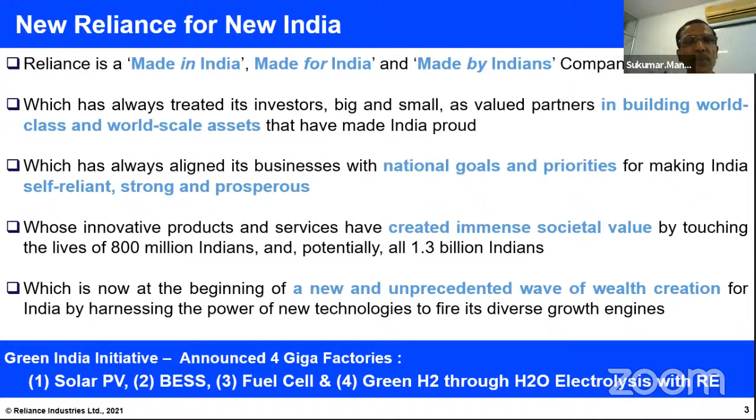And as you know, already our honorable chairman declares that 4 Giga Factories for transitioning the energy, considering the present changes. Now I'll come back to my presentation.

So basically my agenda to cover is a small introduction, then OTC, the oil to chemical approach - what is that, what are the global trends, direct steam cracking, then different configurations for max aromatics or max olefins. Then I'll talk a little about the MCC process, called multi-zone catalytic cracking process, and the economic comparisons of the different configurations with MCC. And then I'll summarize.

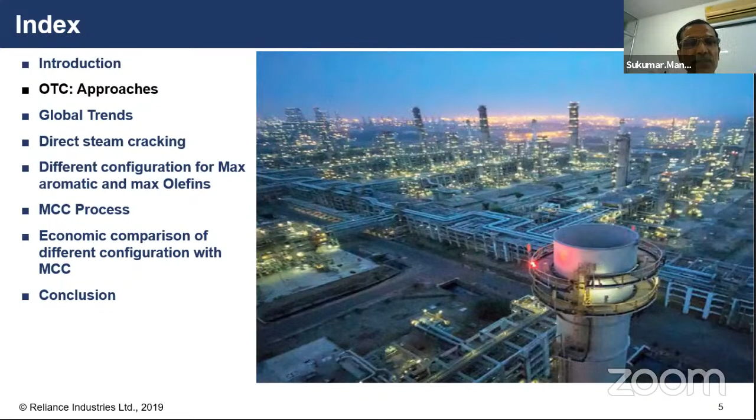Now, why is the future of oil in chemicals? To address that, the major point is that innovation in oil to chemical technology development is mainly driven by 2 major factors. The first: depending on the rate of transition from the IC engine to EV, global demand on transportation fuel like gasoline and diesel may reach a peak around the year 2030, and may begin to decline rapidly beyond 2040, and thus the market needs new directions. Different people may pick a different year for this peak, but surely it is going to reach a peak and then decline, considering the present facts.

The second factor is that the supply-demand gap for chemicals and petrochemicals is increasing rapidly, especially in India, with an upward trend in GDP. As you know, GDP growth times 1.5 is basically the chemical growth - this is a notional kind of correlation. Hence, oil to chemicals is an opportunity to convert low value into high value chemicals, and therefore there's a push to convert barrels of oil into the chemical market. Hence, several disruptive technologies are being developed that remove the boundary between refinery and petrochemical plants while improving margin over making fuel products.

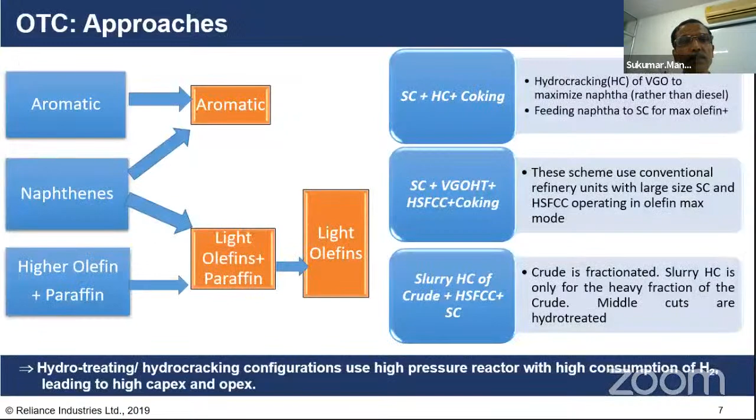So now, what is the whole global trend? Existing refineries are reconfiguring towards 10-25% crude to chemical, because presently, less than 10% of crude is converted to BTX and olefins. So by using existing refineries with existing processes, new catalysts, and new asset additions, making olefins and chemicals at 10-25% - that's why they adopt steam crackers to upgrade C3, C4 to light olefins.

Then they upgrade the heavy naphtha using a reformer to make high aromatics. You do hydrocracking to make a lighter feedstock for the steam cracker, or make a feedstock for the high severity FCC, and high severity FCC basically upgrades the VGO to light olefins and gasoline. This is the normal trend - one of them is steam cracking of the entire crude to light olefins.

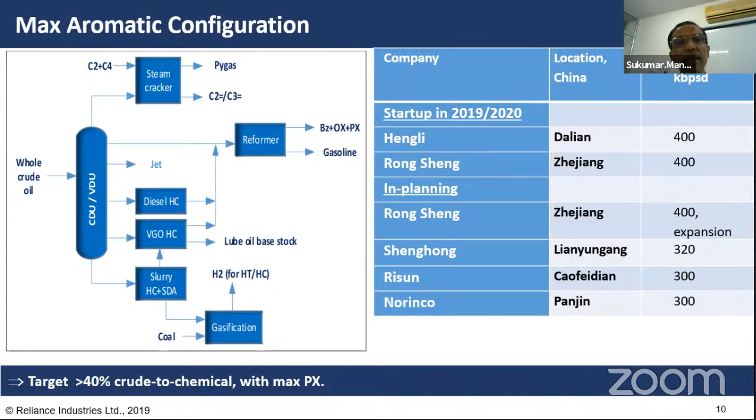Based on this configuration, some examples are well known in practice in China, like Hengli refinery, that is Dalian refinery, or Zhejiang refinery. They already have 400 kbpsd in operation, and they are also already planned and operating some of these refineries, like Zhejiang, Lianyungang, Caofeidian, and Panjin. This configuration's main aim is to maximize BTX.

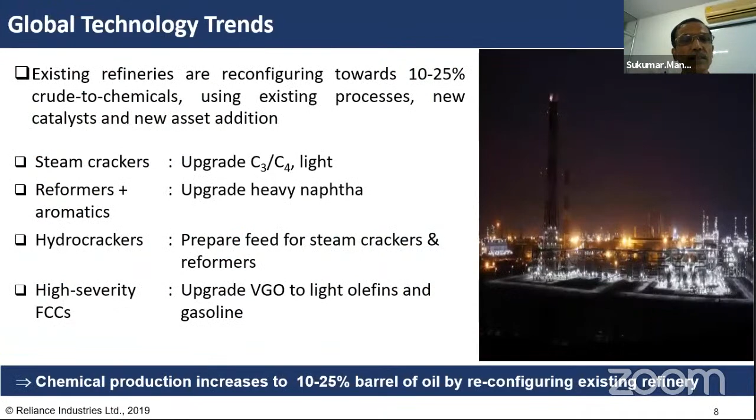Sorry. So, Mandalji, 3 minutes. Yeah.

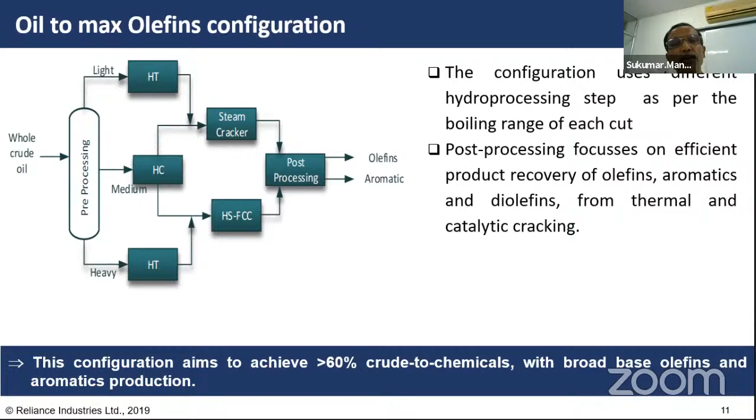In this configuration, basically to maximize olefin, this is the olefin-maximizing configuration. If you see, it uses again hydrotreating, hydrocracking, and ultimately steam cracker and HSFCC. After post-processing, they are making olefins and aromatics. This configuration's purpose is to make more olefin, particularly ethylene.

Then, in this context, Reliance has developed a process called multi-zone catalytic cracking, where a single riser with multi-zones does sequential cracking of different available feedstocks: crude, C4 to resid, both paraffinic and olefinic feeds, and oxygenates. It makes petrochemicals more than 70%, including ethylene more than 25%, propylene 30 to 35%, and BTX 15%.

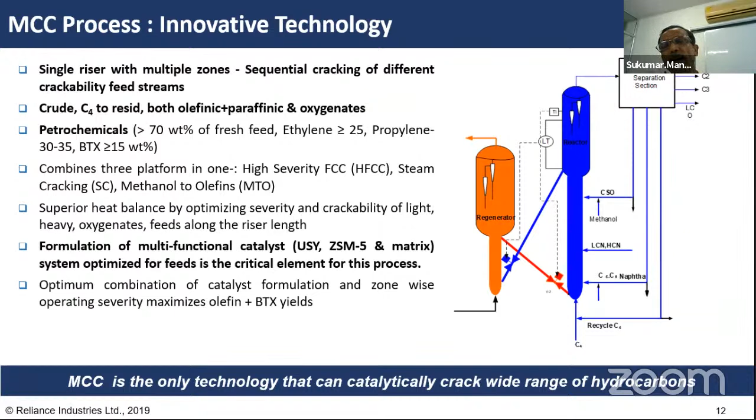This is possible by a combination of multifunctional catalysts, and it's basically a heat balance between light feed and heavy feed. This configuration is like FCC, but the major innovation is that it is a multi-zone catalytic cracking, and you are injecting feed depending on the cracking severity required for each kind of feedstock to be processed.

The right side configuration shows the MCC reactor, gas fractionators, and after separation, whatever ethane and propane is there, you basically send to the gas cracker furnace, using the same gas configuration again. Whatever naphtha you are producing, you do aromatic extraction using a Reliance innovative process. So you take the naphtha out, the aromatics out, and then recycle the non-aromatic part back to the riser.

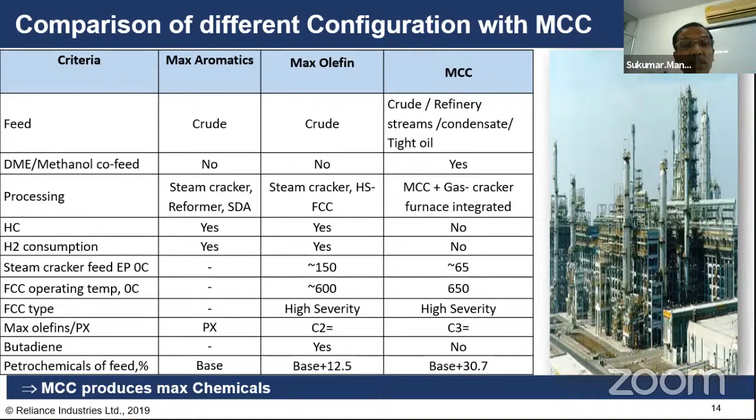And if you see this value, the MCC case maximizes both BTX and olefins. This last slide compares the yield. What we have done here, we call it constant HVC, meaning high value chemical - that is ethylene, propylene, and BTX.

So here we have compared making 4.75 million metric tons of high value chemicals. In the first configuration, the max aromatic case makes 7.6 ethylene, which is 20.6 for the max olefin case, and for MCC case is 22. Propylene is only 2.94, whereas it is 20 for the max olefin case, and in case of MCC 31.3. BTX is maximized for the max aromatic case, that's 28.4, it is 11.1 for max olefin, then 16.3 for our case.

So the total high value chemical yield is 42.6% for the high aromatic case, whereas the high olefin case is 52 plus, and it is around 70% for the MCC case. And if you see the capex, capacity and all, you need 12.2 million metric tons for making the same amount of HVC, whereas in case of MCC it requires only 6.8. The capex is basically more or less only 55% of the base case. The simple payback is only 3.24 versus 5.

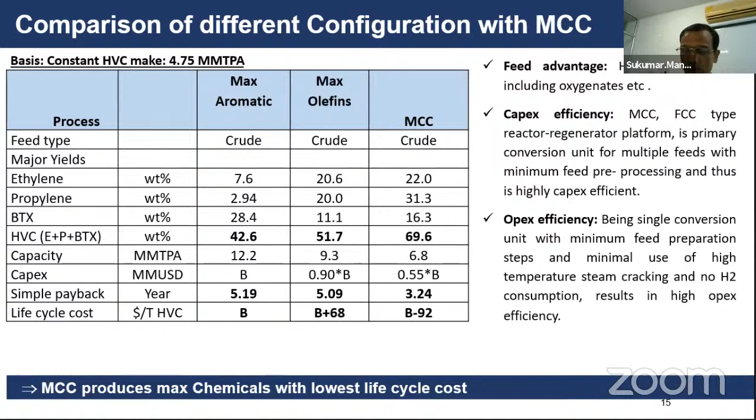And the life cycle cost, which is calculated based on capex charges plus operating cost, in our case shows an advantage of more or less around $100 per metric ton. This is only possible due to three factors: feed advantage, capex efficiency, and OPEX efficiency. That's the reason for getting the advantage for the MCC process.

So I just want to conclude from this: chemicals will continue to grow due to decline in the growth of transportation fuel. Steam cracking of crude oil to chemicals is not an attractive option. New crude-to-chemical refinery configurations are being developed, exploiting ultimate integration of existing technologies. In this context, MCC provides one such most flexible and capex-OPEX efficient platform, using a highly innovative patented multi-zone concept, which solves many contradictions in the direct conversion of crude oil to chemicals, with great high yield of chemicals and virtually no production of fuels.

With that, thank you very much. We feel the MCC will be a disruptive process for converting a refinery from fuel refinery to chemical refinery. Thank you very much for listening.

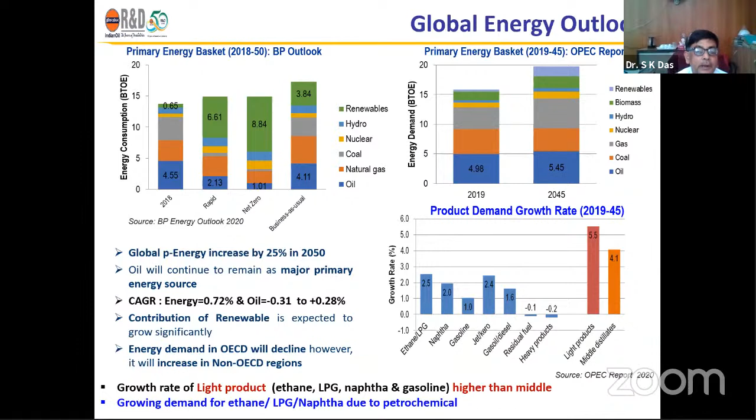As per BP outlook, under all scenarios - business as usual, rapid transition, net zero - Indian primary energy consumption more than doubles by 2050, and the growth is underpinned by the increasing population and prosperity of India. As a result of strong growth, India accounts for 35% of the increase in global primary energy consumption from 2018 to 2050 in the business as usual scenario.

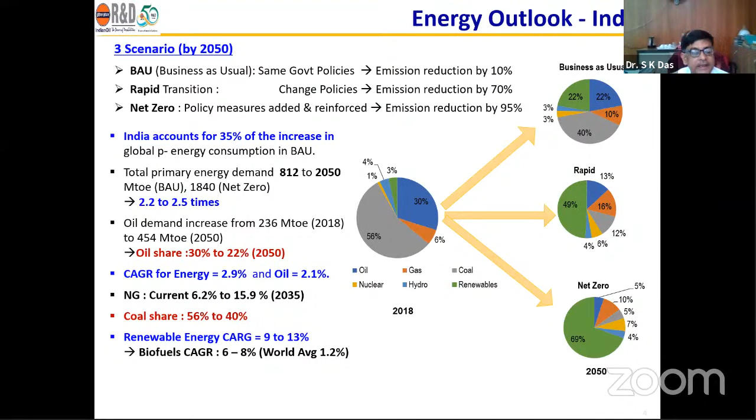However, the contribution of oil in the energy mix may decrease as strict regulatory policy continues to be enforced. In order to ensure the profitability of the refinery, emission reduction along with enhancing chemical yield are to be adopted in a big way. The petrochemical demand forecast based on OPEC and IHS Markit is shown here. Growth in petrochemicals will be contributing about 35 to 40% increase in total oil demand.

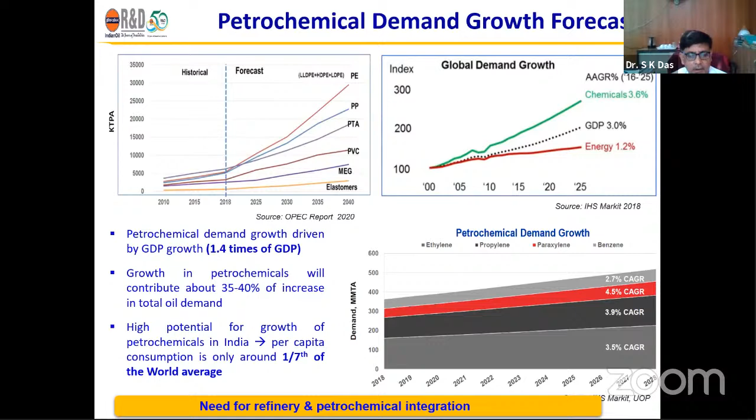Petrochemical demand growth rate is driven by GDP growth rate. It is almost around 1.4 times of GDP. There is a high potential of growth of petrochemical in India since per capita consumption is only 1/7 of the world average. So there is a need for refinery and petrochemical integration.

So what will be the refinery scenario and strategy? They have to maximize distillate production with heavier crude for further conversion and integration with petrochemical, value addition through specialty chemical, and operation flexibility as per crude quality and product demand, and be environment friendly.

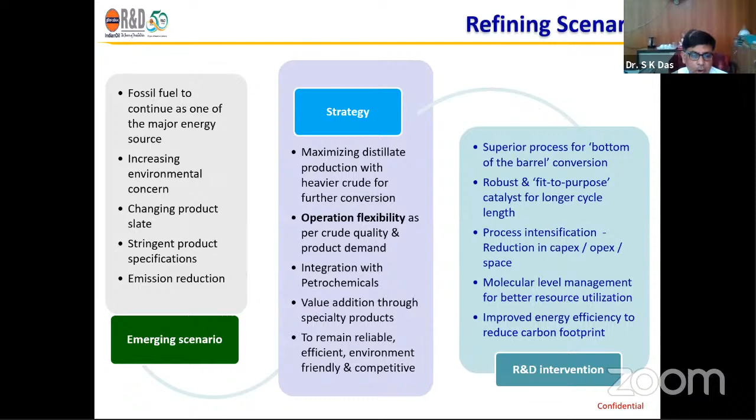A lot of strong R&D intervention is required for development of superior process, bottom of the barrel type conversion, robust fit to purpose catalyst for longer cycle life, and for reduction of carbon footprint, molecular level management for better resource utilization, etc.

As you are all aware, the crude is becoming heavier day by day. So resid content in the crude is also increasing. More resid in the crude means complexity of the refinery also increases. So resid management is a cornerstone of the crude to chemical project selection.

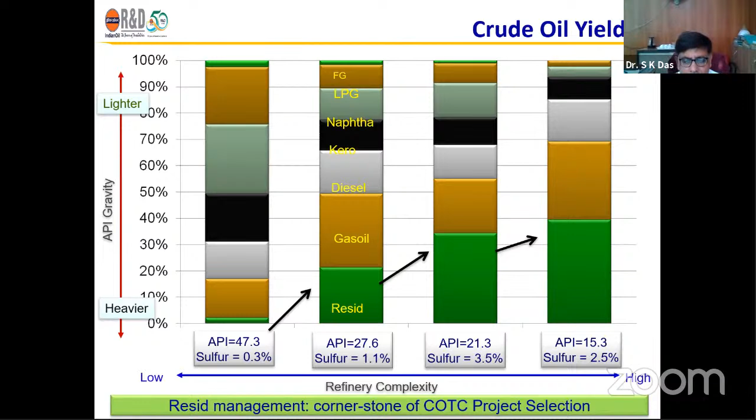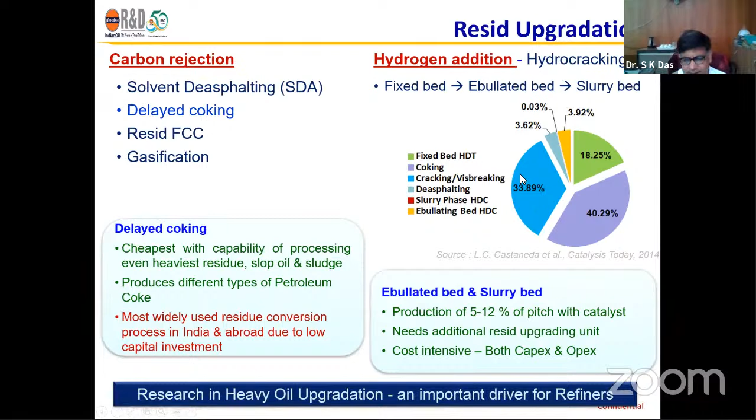Hydrocracking, a hydrogen addition process, has fixed bed, ebullated bed, and slurry bed configurations, but they produce 5 to 12% pitch with catalyst, though it is cost intensive on both counts. So research in heavy oil upgradation is an important driver for the refinery.

So IndianOil's solutions for resid upgradation for the crude to chemical scenario. Several internal resid upgradation technologies. Indmax is a milestone technology which can handle VGO up to resid feedstock ratio.

It is a technology for VGO stock. It produces higher light olefins - ethylene, propylene, butylene - high octane gasoline rich in BTX. Delayed coker is another technology for converting resid to value added product through thermal route. Ind-Coker is our advanced coker technology for reduction of coke yield from fuel grade coke. indResid is a slurry hydrocracking technology for upgrading vacuum resid for production of middle distillate meeting BS6 specification.

We have a gasifier technology for converting coke to value-added syngas. Syngas can be further converted to olefins. Along with secondary conversion coupled with residue upgradation, we have INDALIN technology for catalytic cracking, enhancing olefin yield from lighter feedstock such as cracked naphtha.

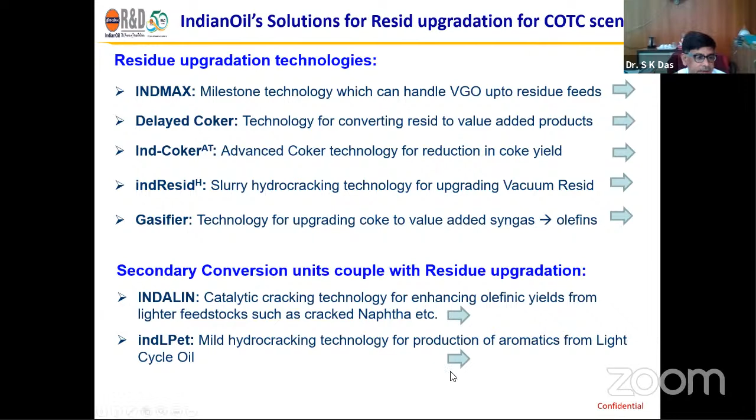indLPet is our novel mild hydrocracking technology for production of aromatics from light cycle oil. Indmax is our flagship technology. It can process a wide range of feedstock, with process flexibility to switch over to produce products suiting market demand. The typical yield pattern range of the Indmax process

is shown in this table. It produces a higher amount of light olefins and gasoline, rich in BTX, which can easily be integrated with petrochemicals. It also produces feedstock for the alkylation unit and feedstock for ETBE, TAME, and dimer units.

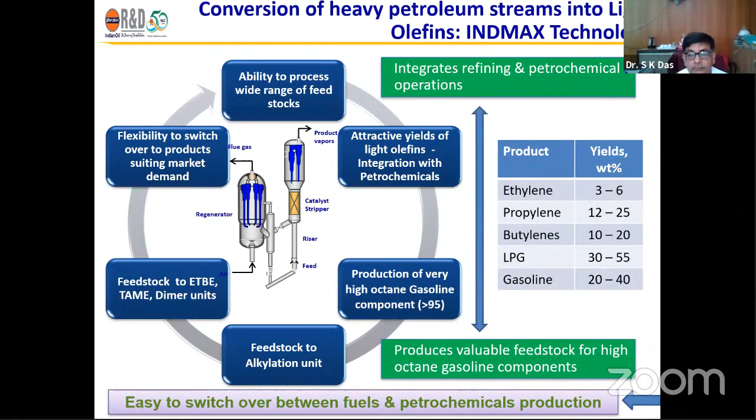Indmax commercial snapshot: several units are coming in the near future. Apart from Indian Oil, we are also licensing to NIS Serbia as well as NRL.

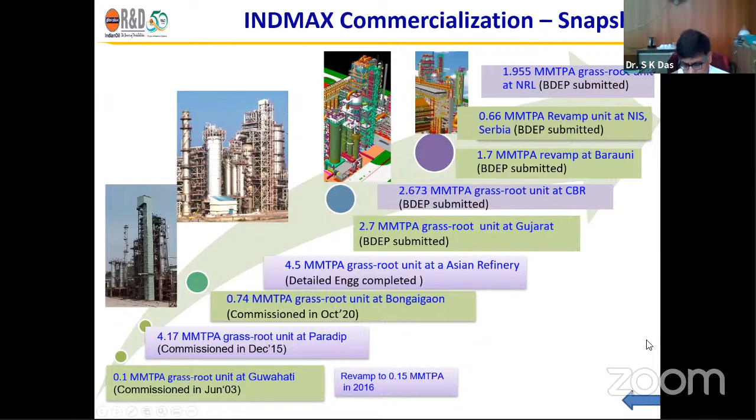For Indian delayed coker technology, we have successfully implemented a commercial 600 TMTPA capacity coker in Barauni refinery, and we are also licensing Barauni coker B, where feed CCR will be 9-10 to 24%. We are also licensing for NRL revamp from 0.306 MMTPA to 0.56 MMTPA with increased feed CCR from 19.72 to 30%. Indian Oil also developed advanced coker technology for reduction of coke yield for fuel grade coke.

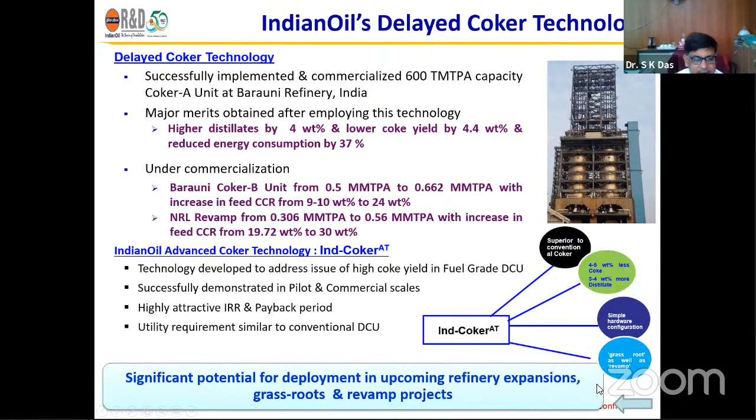It has been successfully demonstrated at pilot and commercial scale. It is superior to conventional coker, producing 4 to 5% less coke compared to conventional coker. Utility requirements are similar to conventional coker. It has a highly attractive IRR and payback period, and significant potential for deployment in upcoming refinery expansion, grassroots, and revamp projects.

We also have an indResid project. This is the upgradation of vacuum residue using hydrocracking process, with conversion around 94 to 96%, and middle distillate yield around 55-65%, meeting BS6 specification.

Whenever there is fuel demand, we can divert it to the Indmax unit along with the Indmax feedstock. We can produce more light olefins and aromatics, and the LCO range from Indmax we can send to indLPet for production of aromatics in the crude to chemical scenario.

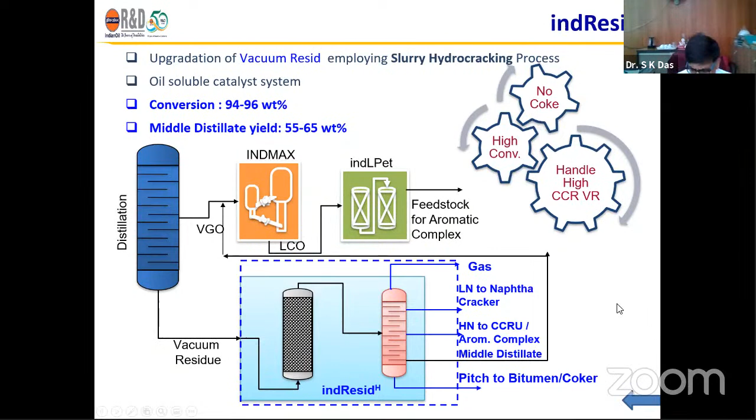That's 3 more minutes. Regarding crude to chemical, Sukumar Mandal has already spoken about this in this session, so I am not going into that. I will go to the Indian crude to chemical IOCL technology.

IOCL configuration consists of major Indian Oil technologies: Indalin, indLPet, Indmax, Ind-Coker, and indResid. Here we can see the crude is firstly separated and fractionated into light, middle, and heavy cuts.

The lighter cuts such as SRN, coker naphtha from Ind-Coker, and LN from indLPet are utilized in the Indalin unit, which is basically a catalytic cracking unit, producing light olefins and aromatics.

The middle cut is in the range of VGO, utilized in the InMax unit for production of olefins. LCO stream from the InMax unit is utilized in the indLPet unit for production of aromatics. The heavier cut is utilized either in InResid or Ind-Coker for extracting value-added products from resid.

This configuration can produce chemicals up to more than 58%. If we put our own gasifier to gasify our Ind-Coker coke, the syngas produced will be further converted to chemicals. It is possible to increase chemicals by around 2%.

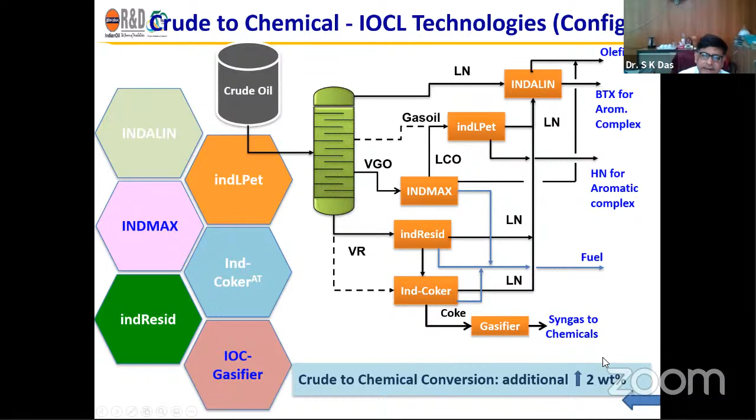If we put a naphtha cracker unit, a thermal naphtha cracker unit, in our configuration, and recycle C2-C3 along with part of Indalin naphtha, then our crude to chemical conversion would additionally increase by 8%.

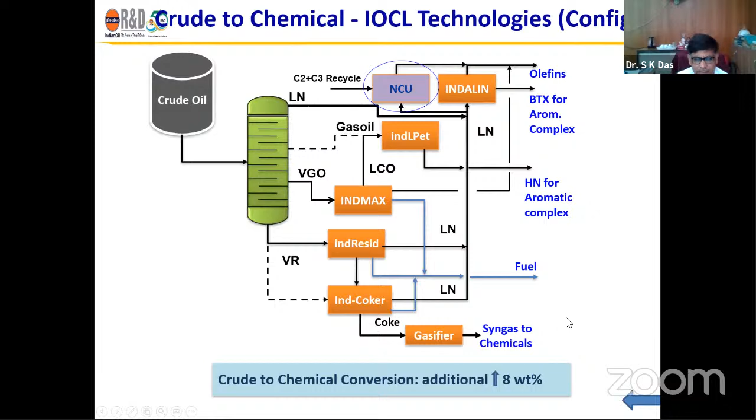In summary: crude oil demand growth was expected to decline due to changes in the global primary energy mix, and light olefin derivative import dependency is projected to increase in the Indian scenario. Refinery and petrochemical integration, and resid management, are key factors for higher crude to chemical conversion.

Indian Oil has developed several state-of-the-art residue upgradation technologies such as INDMAX, delayed coker, Ind-Coker, indResid, and gasification, plugging into the crude to chemical configuration, along with secondary conversion units such as Indalin and indLPet.

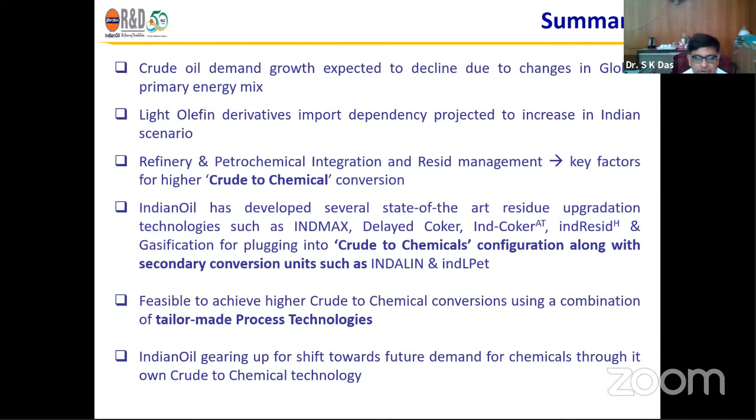It is feasible to achieve higher crude to chemical conversion using a combination of tailor-made process technology. Indian Oil was gearing up for the shift toward future demand for chemicals through its own crude to chemical technology. Thank you, audience, for patiently listening, and thank you to the organization for giving me the opportunity to present.

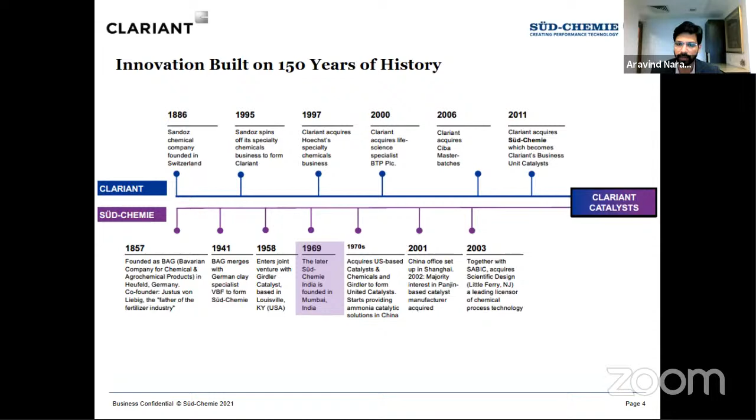So Clariant has three business areas: one is care chemicals, one is catalysis, and one is natural resources. Catalysis is the Süd-Chemie business.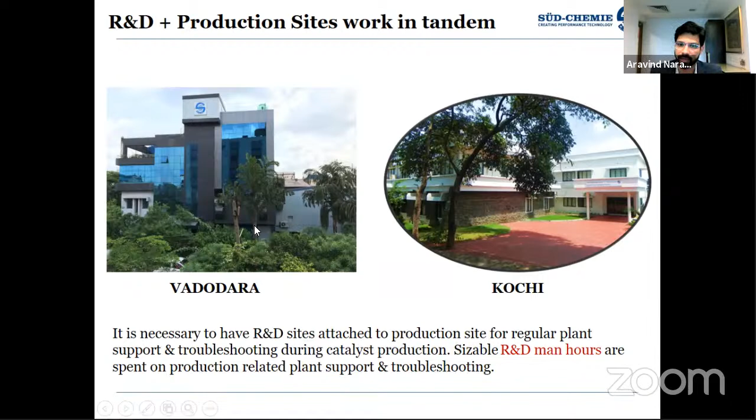We started in Kochi in 1969. This is the production site where we make a lot of the syngas catalysts, copper-zinc-based catalysts, and vanadium pentoxide catalysts. In 1974, we started the second manufacturing unit in Baroda, where we make most of the refining catalysts, FCC additives, automotive and mobile catalytic converters, and all of these. Both production sites have R&Ds associated with them, because in addition to innovation, the R&D also spends a lot of time in troubleshooting and plant support activities.

We'll touch upon the product portfolio a little bit. BU Catalyst has different market segments. The major market segments are petrochemicals, gas, refinery, olefin polymerization, and specialty applications. In terms of the top line, our biggest sales in terms of revenue comes from petrochemicals, and when we say petrochemicals, these are the catalysts which go into the production of ethylene and propylene.

To give you more details, in the steam cracker you have selective hydrogenation catalysts and pygas hydrogenation, which is the heavy fraction that comes out from the steam cracker. There is a propylene recovery unit - it could be propylene from the cracker or propylene from the FCC unit. Then there is on-purpose propylene production: PDH, methanol to propylene, styrene, EDC, PVC, and PTA.

In the syngas area, there is a catalyst for ammonia, methanol, DRI for steel plants, sulfuric acid, and a whole bunch of catalysts used downstream of gasification units, involving purification of the syngas that comes from coal gasification or petcoke gasification. There is sour shift, and then there is SNG catalyst.

On the refinery side, one of our mainstream products is hydrogen. There are traps and guards for various impurities removal, like sulfur traps and chloride traps. There are catalysts for isomerization - these are high temperature zeolite-based isomerization. Dewaxing, C3C4 olefins, SRU TGTU catalysts, and FCC off-gas recovery units - this is an area gaining a lot of traction with refinery-petrochemical integration.

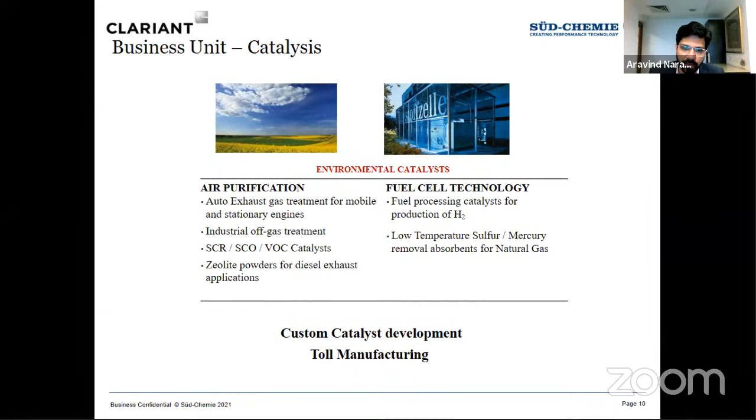On the fuel cell technology side, there are products for processing different fuels that go into the fuel cell, and there are different types of sulfur and mercury traps used for the purification of natural gas. There is also a custom catalyst development and toll manufacturing business in addition to existing products - these are products developed by third parties which leverage our strength in catalyst manufacturing to scale up their recipes.

I will talk a little bit about industry partnership. However good a catalyst is, we cannot derive the full benefit of it unless and until you have good engineering around it. So we also work with a lot of technology licensors.

To give some examples, for olefins production, for example steam crackers, we work with Lummus Technology, Technip, Linde, KBR, and for methanol synthesis we have partnership with Air Liquide. And for direct reduction of iron ore, there is a partnership with Midrex.

But we'd like to focus more on the India partnership. And over the years, the strongest partnership that we had in the refining sector was with Indian Oil for FCC additives and the INMAX catalyst.

We'll give you a little bit of an overview of the collaboration with Indian Oil. Sometime in year 2000, Indian Oil started developing ZSM5 additive. This was used for LPG boosting in FCC units. Indian Oil was one of the first few companies in the downstream sector which was focused on catalysis research.

And when they developed the recipe in the lab scale, they were looking for a partner who could scale up the recipe and make it in commercial scale. At that point of time, Süd-Chemie did not have products for the FCC portfolio, so there was clearly no conflict of interest. The portfolio of FCC additives were complementary in nature to our set of products, so there were clear synergies between Süd-Chemie and Indian Oil.

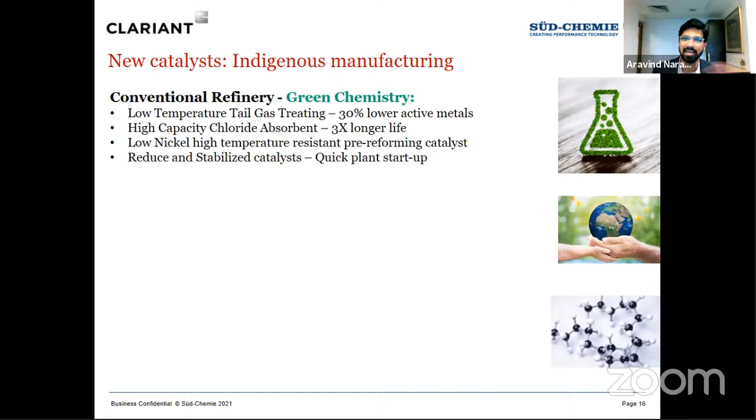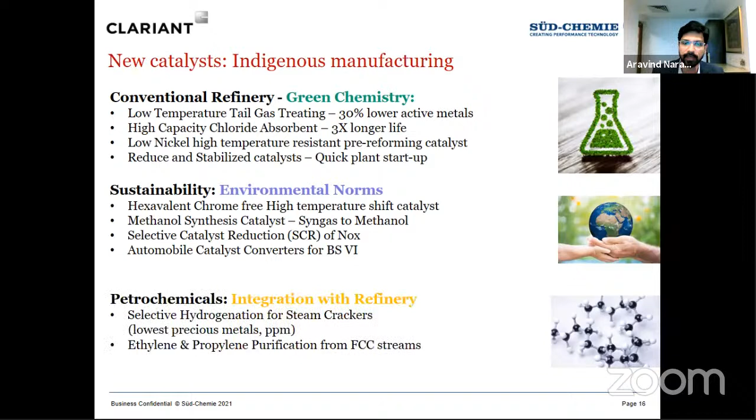Some other examples are in areas of sustainability. Hexavalent chrome is used in high temperature shift catalysts, but to meet the REACH regulations, we had to develop a catalyst which is free of hexavalent chrome. Similarly, there are catalysts for refinery-petrochemical integration, and there are catalysts for energy efficiency. For example, in steam methane reforming, pressure drop is very critical.

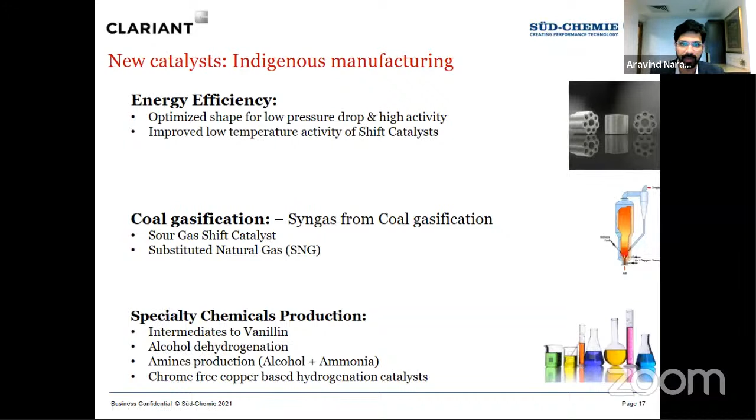As you see the image on the right-hand side, you have a catalyst which, in a certain shape, reduces the pressure drop quite significantly across the reformer. Due to the shortage of time, I have to go a little bit faster on these slides.

Now, coming to the area. Arvind, you might summarize actually, because yeah.

Okay, so we will talk very briefly on what makes catalyst manufacturing unique. If you want to set up a catalyst plant, there is no process licensor, so the technology and recipe, everything has to be developed in-house. Catalyst development is usually a work in progress because every catalyst has only about 5 years of life, and after that a new generation comes into work. So despite technological advancement, lab recipe needs special skill and unique experience to scale up. There's always a question between science and art.

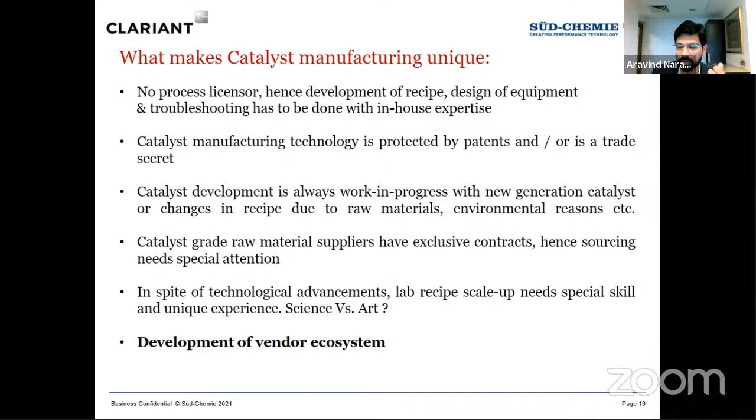A very important thing is development of a vendor ecosystem, which doesn't exist in India. Some of the best practices we suggest to companies in catalyst research are: once a lab recipe is made, reproduce it with commercially available raw materials. Check consistency and reproducibility in multiple batches, at least 3 reproducible batches at each scale. Evaluate the performance of catalyst at each level of scale up - checking physico-chemical properties is not sufficient, we have to evaluate how the performance is. Study the impact of various process conditions on the scale up, see what impacts in what way, and generate data on the effluents, which is very important.

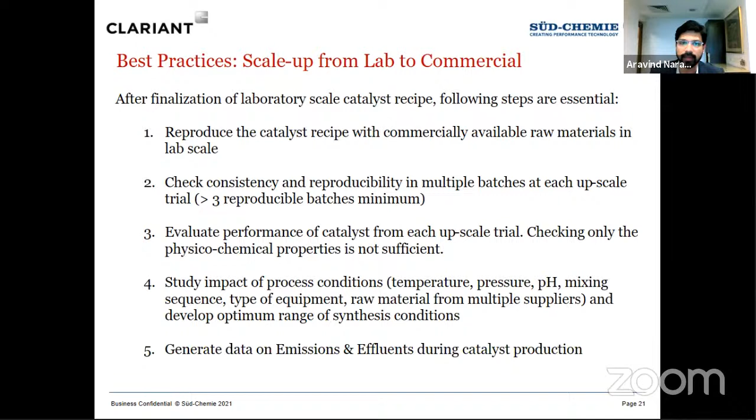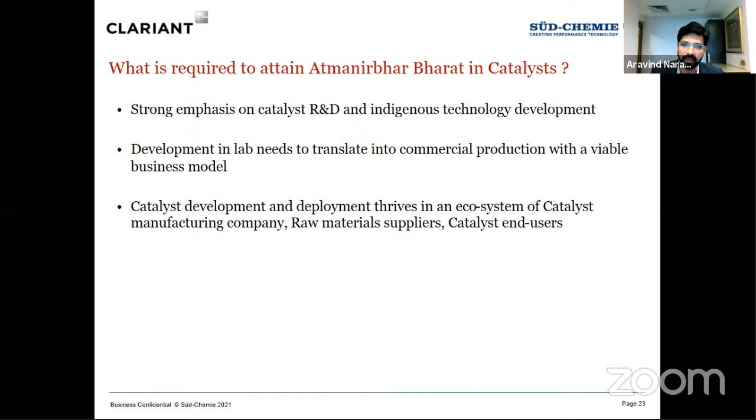We think to accelerate the process of indigenous catalyst production, a collaborative approach is something we need to look for - look for synergies with the catalyst company, look for synergies with operating companies, and start a collaborative approach so that once the catalyst is ready for commercialization, there is a user ready to try it. Last but not least, for any new product introduced to the market, there is hesitation to use it considering the risk. So we believe that to reach Atmanirbhar Bharat, a very strong sense of leadership is required to commit to this area.

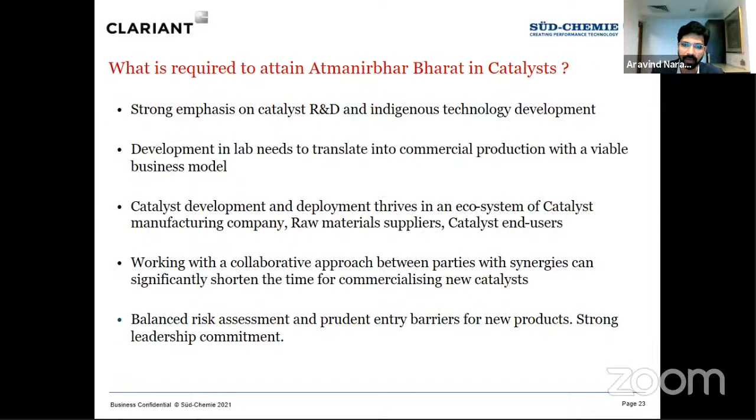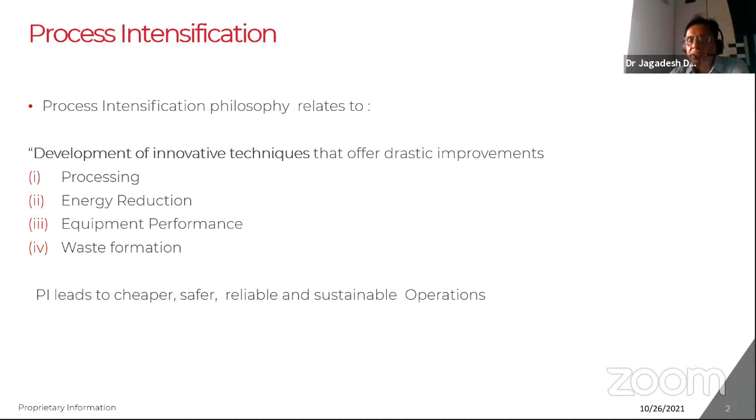Basically, the definition of process intensification, as we chemical engineers look at it, covers process improvements, energy reductions, equipment performance, and waste reduction. These are the various areas where we apply process intensification to get the most economical, reliable, and sustainable operations. This is where I come from.

KBC has 41 years of innovation where we apply process intensification methodology. We are pioneers in applying process intensification for improving yields across technologies. That's what we have been demonstrating to the industry for 40 years.

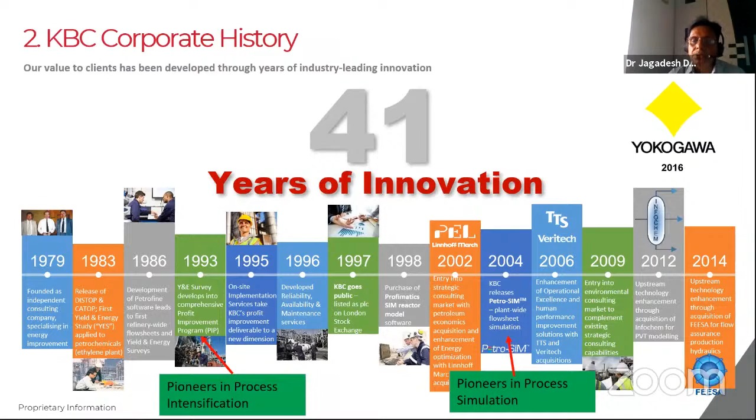We do it very effectively using our leading software called Petro-SIM, which is not only a separation tool but also includes all the reactor models. That's the key for us to implement this kind of process innovation in the industry.

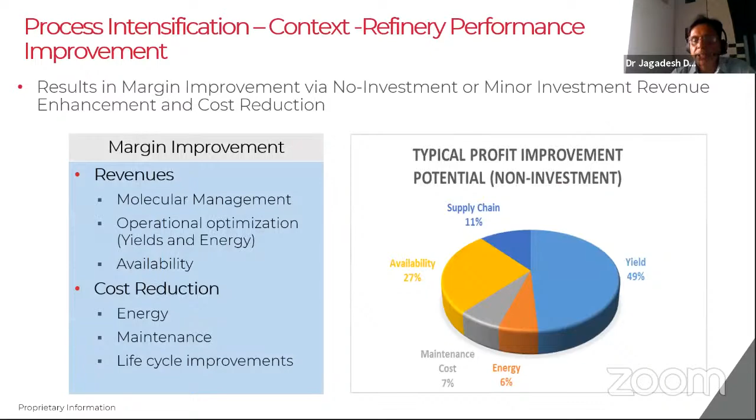We basically focus on 4 or 5 different areas. The first one is the supply chain. If you walk into a refinery, they try to optimize supply chain in selecting crude. Most of the time we find the LP is not very effective, in the sense that they are not using sensitivities like base and delta vectors. That's one of the problems we see in the industry, so we contribute in upgrading the supply chain side.

Then energy reduction - Dr. Sukumar Mandal earlier outlined the net zero aspect. We have been doing these energy programs for 300 sites, and we could see decreasing energy consumption almost up to 5 to 6% in most industries, even within the Indian industry. Last but not least, the maintenance practices, which can give a lot of results.

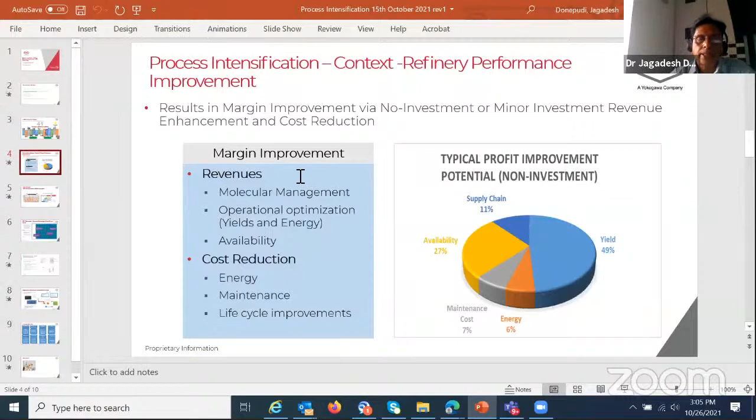There are two main maintenance programs that guzzle money: one is ad hoc maintenance costs, and the other is turnaround. Basically, what KBC does is improve the cycle time between turnarounds or reduce turnaround time, which we have demonstrated in various industries across the globe. That's where again we see improvement in the process.

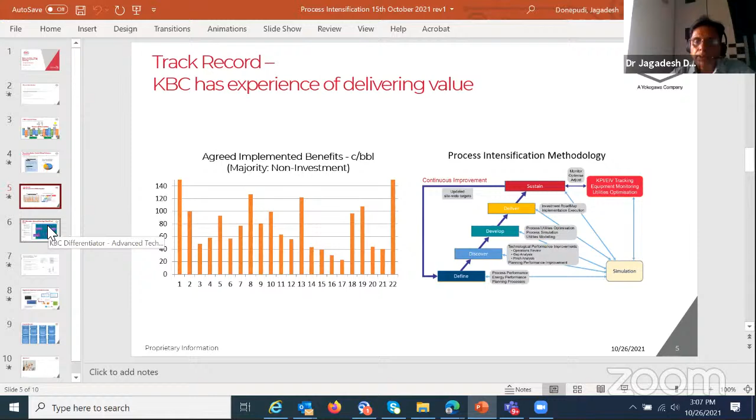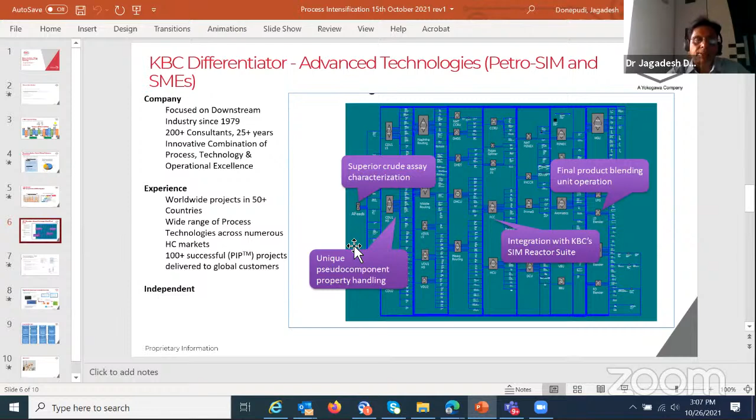We supplement this process simulation with our own team. We have more than 20 to 25 years of experience across different processes, and everybody is a specialist in a given process. We then couple it with these digital twins and arrive at the results. This is how we go about the methodology.

I'm just giving a simple example. Of course, I've seen some of the earlier presentations which have shown a lot of new technologies, but what KBC brings is, whatever technology you have, how best you're utilizing it. That's the kind of innovation we bring in. This is a simple example.

We felt that in a given refinery, isomerate is produced at a very low octane number of 84 versus 87 to 90. Then they had some excess light naphtha. They wanted to route it to the gasoline pool, but the gasoline pool was not allowing it to go. There is room for the octane, but they could not get it with respect to the benzene.

We went back, looked at the feed of the light naphtha. We found a lot of C7 plus, and also we looked at the reactors, how they're functioning. It is a two-system reactor, which has got a lead and lag reactors.

Then we came up with a kind of scheme where we tried to use the lead reactor for cracking more of the C7. If you don't do that, what is happening is the C7s are cracking, but they're isomerizing, and more of NC6 is forming. That's the reason why the DIH bottom has got less octane. So this is the kind of innovation, the kind of process intensity we go into a given process, and then we try to improve that.

Right now we are working at a number of refineries, improving various processes, resulting in, as I explained earlier, something like 40 to 50 cents per barrel, or about $50 million.

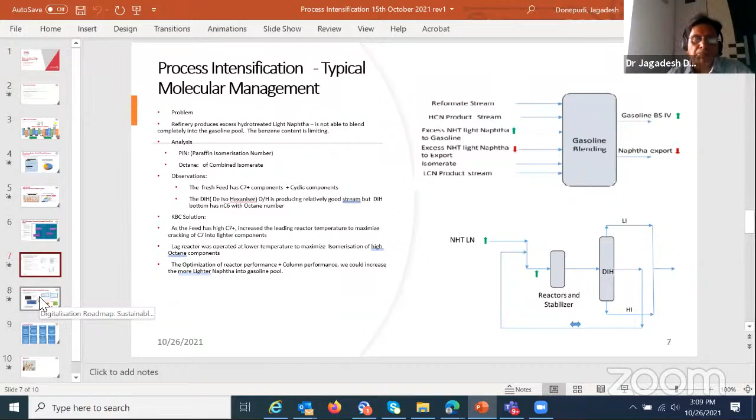This is what we're trying to do: the technology doesn't have to be in the hands of the people, so we are trying to digitalize it. In the digitalization, what we're trying to do is reduce the gap from the time you start identifying the idea to implementation, using this one connected to real time.

Then we are developing the entire refinery-wide flow sheet. That refinery-wide flow sheet takes data, analyzes it, and then compares it with the best benchmarking operating parameters using the AI/ML loops. And then it gives you a dashboard showing where you are in terms of the different processes.

What are those gaps? Also some intelligence has been embedded into these loops. What it does is it tells you whether you're operating your column at high pressure or low pressure, whether you're operating your furnace at different heat duties. So that's what we're trying to do.

And this particular process-side optimization is also integrated with the energy. Most of the time the energy is towards the supply side, how you're optimizing the steam, oil, or gas. Then what we're trying to do is, from the demand side, calculate what is the energy intensity required. That energy is fed back into our energy side, and then a kind of closed loop is formed between the process and energy optimization.

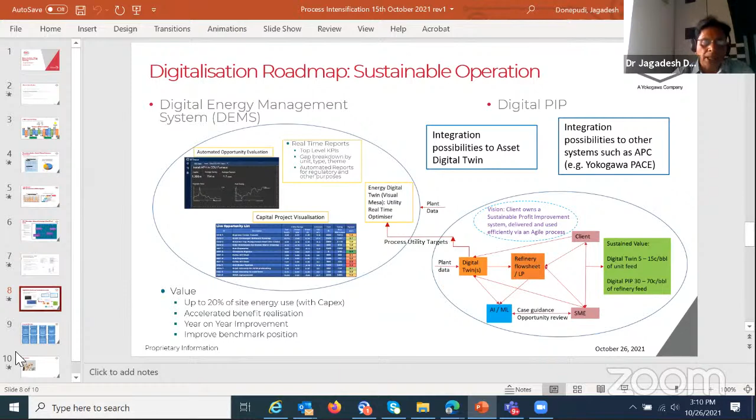That's how we are trying to utilize digitalization in arriving at all this process improvement, in relatively less time, and it is also online. With this, we are able to find a lot of value.

We are finding right now some of the refineries are able to realize value. One, in terms of visualization itself, when they compare the actual business with the plan, most of the time there's a lot of deviation. They're able to correct it very much on time.

And the second, on the process optimization side, most people are not able to go across the constraints. We are looking at the constraints very carefully and seeing what kind of gaps you have. Similarly, on the giveaways like RVPs, etc.

And also we are trying to look at the energy side. Most of the time, energy benchmarking is a one or two year exercise, but we are making it online energy benchmarking, looking at all the processes, what kind of specific consumption it is taking, and trying to have real-time benchmarking.

And with that, we are not stopping. We're also identifying the gaps, whether it is furnace, whether it is preheat trains, or any kind of equipment. That's how we are able to save something like 4 to 5 cents per barrel for a given refinery.

And also we are trying to monitor online on the fouling side, corrosion. These are some of the problems which we feel, with online optimization, we could get 3 to 10 cents. Whatever I've shown you is most practical, where we have implemented it.

It's not from any kind of book or anything. So this is the kind of philosophy of process intensification we are applying to major oil companies in India as well as globally. Thank you.

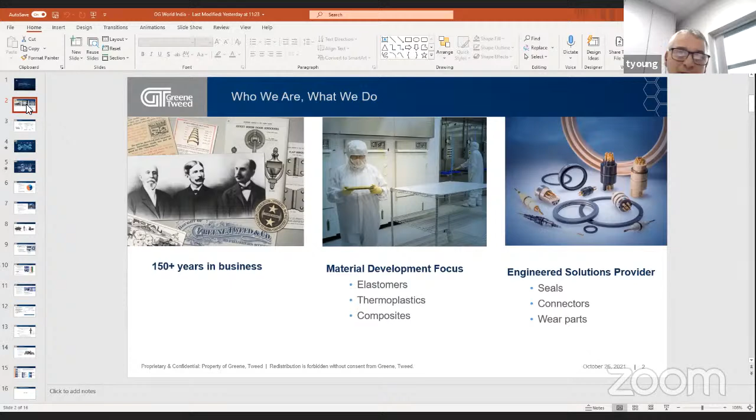We have a very much global presence, with over 1,700 employees working directly for the company across 11 countries. We have manufacturing sites in Taiwan, the UK, and 3 in the US, and we work with channel partners to give us a bigger global presence. We also have one in India, which is Vintech, which I'm sure you work with closely.

We serve a variety of markets, from aerospace and defense, semiconductor, industrial, and oil and gas, which is obviously where we're concentrating today.

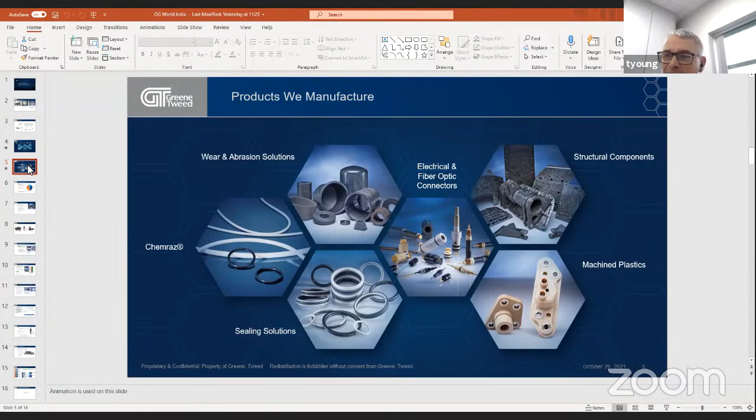We manufacture a variety of products. Chemraz is our perfluoroelastomer, often used in the chemical industry. We have many sealing solution options, which can be PTFE, elastomeric, or thermoplastics, structural components for aerospace, electrical and fiber connectors often used on the drilling side for crude oil, and wear and abrasion solutions, which is where we're going to concentrate today.

Greene Tweed has over 30 years experience with our composites in centrifugal pumps for the oil market and for chemical processing. Over these 30 years, we've developed many materials to give optimum solutions within pumps.

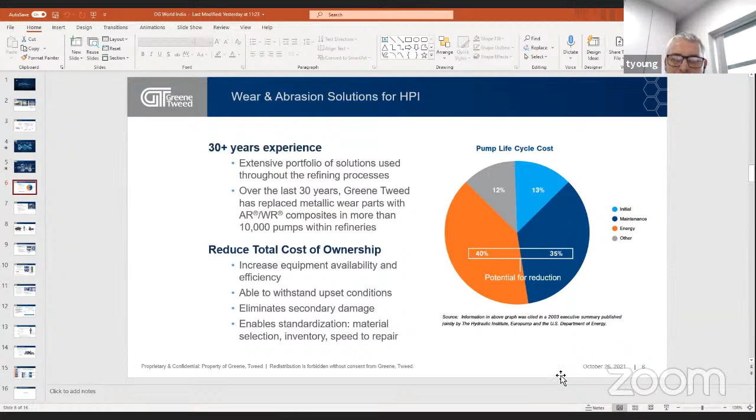This is where Greene Tweed can offer some advantage, by increasing equipment efficiency through closing down running clearances. We're able to withstand upset conditions, offer standardization, and we can include inventory and repair benefits.

Our wear and abrasive solutions, our high-performance thermoplastic composites and abrasion parts in pumps, can increase efficiency and ensure increased reliability. We increase the mean time between having to retrofit your pump away from lower quality non-metallic materials and rubber components. Our WR wear resistant materials are PEEK or PFA matrix based, and normally with carbon fiber reinforcement to give the materials their strength and properties.

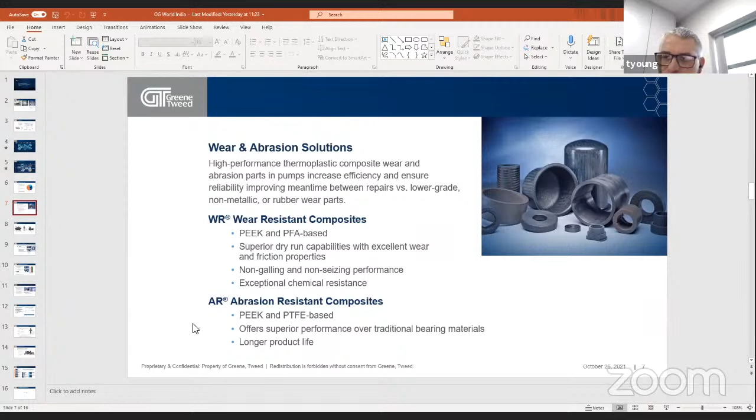They offer superior dry run capabilities and excellent wear and friction properties, and they're non-gall, non-seize, with exceptional chemical resistance. Our AR materials, again, are PEEK or PTFE based and offer superior performance over traditional bearing materials and longer product life.

Where are our products used? Within any type of centrifugal pump where you have wear rings, bearings or bushings. In a typical horizontal multi-stage pump, you may have up to 12 wear rings, a center bushing, and bearings, where you can replace traditional metallics with a Greene Tweed composite solution to reduce running clearances. The same applies with a vertical pump for your line shaft bearings or a typical overhung pump.

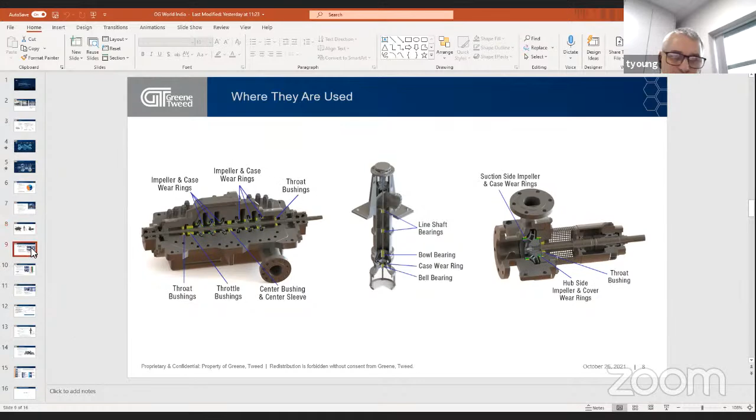Greene Tweed's WR materials, WR standing for wear resistance, have the potential to reduce the running clearances in your pumps by 50% to maximize pump efficiency and performance. They offer high corrosion resistance, a broad temperature range and chemical compatibility, non-seize, non-gall, and we can offer extended life over metallic rotating components, improving overall pump efficiency.

Our three materials are WR300 and 525, which would be used for your case or impeller wear rings and bearings, and our WR575, which you would use for your thrust plates and pads.

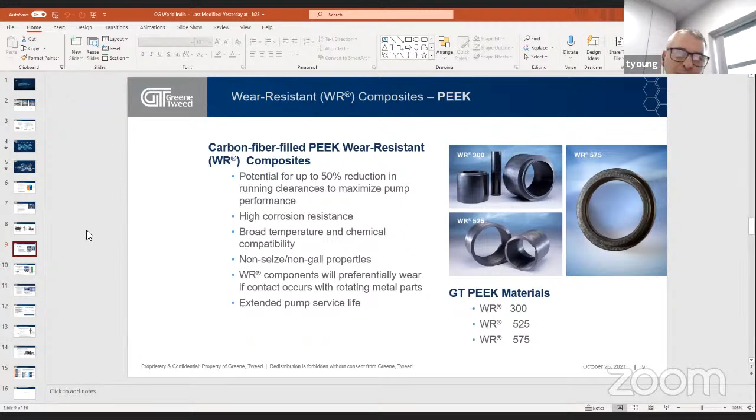Our PFA-based materials offer similar properties to our PEEK-based materials, but because they're PFA, perfluoroalkoxy, they're more like a PTFE matrix. So they offer universal chemical resistance where PEEK would be attacked in certain chemical processes. And they offer best dry run capabilities, because the PTFE is pretty non-stick and a great material that you can use.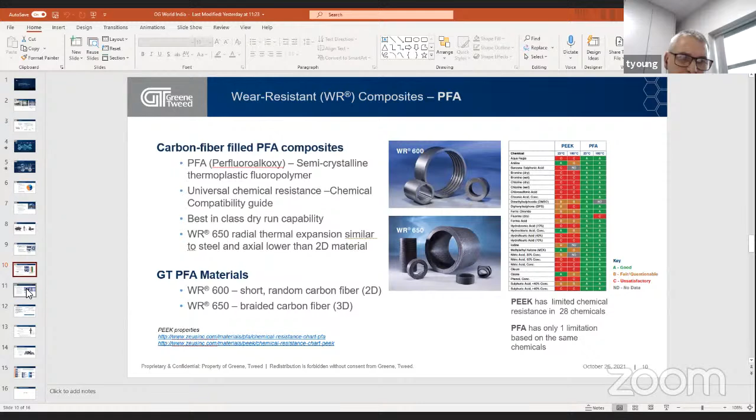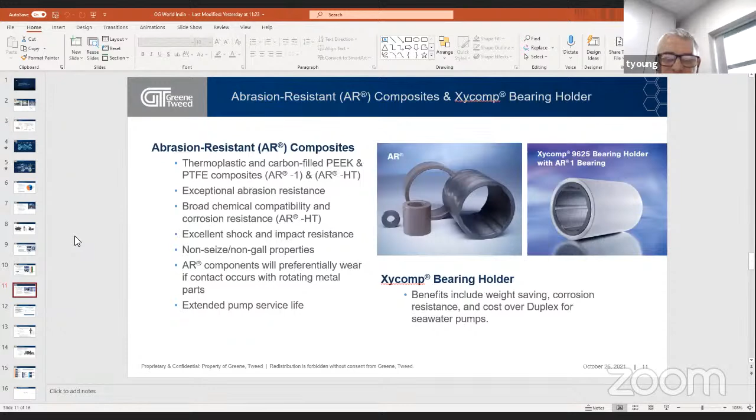Our AR materials are our abrasion resistant AR composites. These are PEEK or PTFE composites. They offer exceptional abrasion resistance, often used in cooling water pumps to cool down chemicals around refineries. They offer broad chemical compatibility and corrosion resistance because of the PTFE content. They offer excellent shock and impact resistance, non-gall, non-seize, which is critical if you have any upset conditions within the pumps, and they can offer an extended pump service life.

Here we have a case history from Chevron in the United States, where we worked with them very closely. They were able to use our WR and AR materials along a refinery expansion, and they optimized every possible option to use our materials within their pump upgrades. What we see here is a total of just under 6,500 pump population, and we increased their MTBR from 66 to 97 months, a massive increase that gave them a big boost in production ability over the life cycle of their pumps.

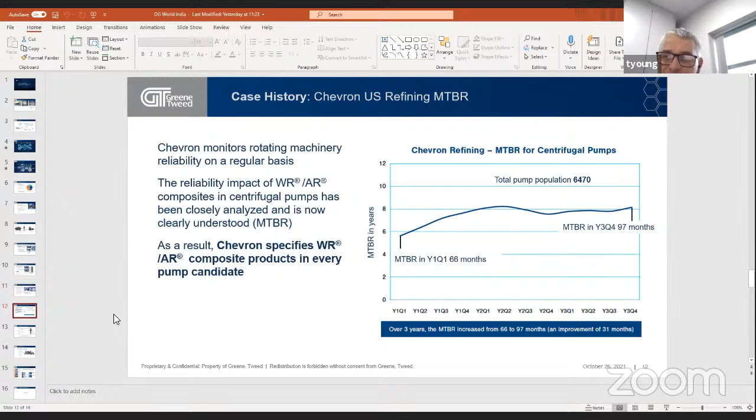Very similar with our AR materials. These were 12 circulating water pumps with cutlass rubber bearings. They handled very abrasive media with salt water, and suffered excessive wear and vibration, so premature pump failure, which led to bearing failures and pump outage every 18 months. These were at ambient to 43 degrees Celsius temperature, high flow rates, and low differential pressure.

What we did was use our AR1 material, and we were able to reduce their running clearance from 0.6 of a millimeter to 0.38, which reduced vibration on their shaft by over 75%. And we gave them an additional safety factor because of the non-gall, non-seize properties of the material. We actually doubled their pump life cycle, going from 18 to 36 months, and saved them $1.5 to $2 million in maintenance, over a 12 pump range. This was purely because we were able to double their pump life, meaning they didn't have to spend £100,000 every time they needed to take the pump out to replace it.

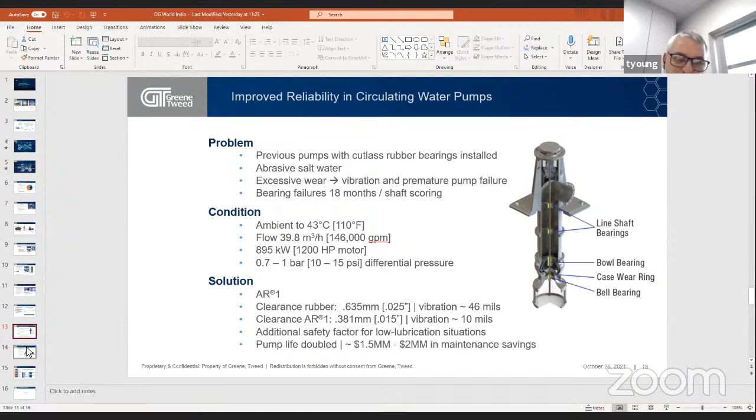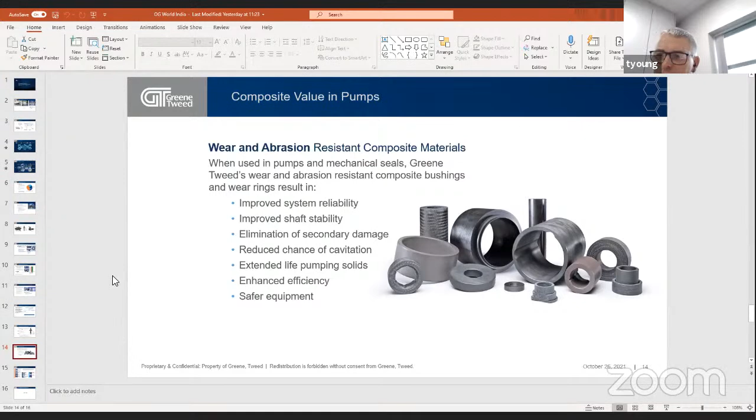So the value of composites in pumps really is you can improve system reliability, improve shaft stability, eliminate any secondary damage to the metal components, reduce cavitation, and extend life pumping with solids in there. We have enhanced efficiency and safety of the equipment. All of Greene Tweed's materials offer non-gall, non-seize, but also no sparks, which can be quite critical with some chemical processes.

So our full composite solutions and offerings for pumps with our WR range: we have our WR300, which is PEEK reinforced with short random carbon fibers. Our WR525 is PEEK with a continuously wound carbon fiber tape. Our 575 is made up of carbon woven plates. It's the manufacturing process that gives the materials each unique property across various temperatures and pressure ranges. So we offer a complete solution within there, not just one material fits all.

Very similarly with our WR600 and 650, but offering better chemical resistance and dry run capabilities. And then our AR1 and AR-HT materials for abrasive service. We also have a Xycomp holder, which is very lightweight. If you're comparing this in a large vertical pump, replacing it from duplex steel, it's a third of the weight, much cheaper and easier to obtain for a full solution that fits a vertical pump. We also offer labyrinth seals for gas compressors and Xycomp shell for certain types of pumps.

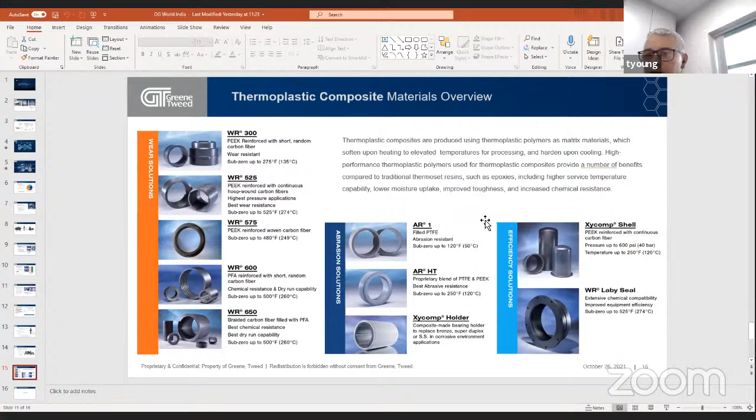So that is a very brief introduction to Greene Tweed and our composite solutions for pumps.

Dr. Young, I think very nice presentation on how pump efficiency can be increased by using thermoplastic composites, so you have several of those products. Now I'll be reading out questions put in the chat. So far we could see only two questions. One is addressed to Mr. Mandal of Reliance, so I'll read out the question.

Does MCC prepare BTX itself, or does it produce heavy naphtha for further reforming to produce BTX? This is the first one. The subsequent question is that in MCC's case, ethylene and propylene are very high, together about 54%. Whether MCC is a single process unit or a combination of steam cracking and other units. Whether any other co-feed like methanol or ethanol are to be processed along with crude oil. So essentially three questions, Mr. Mandal, if you can take those.

Let me just address this, but I think if I can display my configuration, the answer will be very clean. Yeah, please display it, no problem. Just a minute. Hope my presentation is visible, right? Yes, yes, yeah. You can see it here.

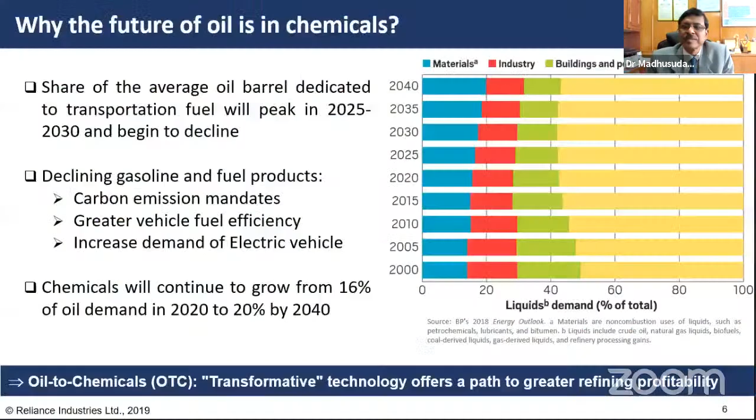The answer to the first question, whether aromatics are produced from MCC or heavy naphtha is sent to the platformer: we need not send the heavy naphtha to the platformer, it is not anywhere in the configuration. The BTX is produced from the MCC riser reactor. Only thing is you have to separate this BTX from the naphtha, and we have a BTX aromatic separation process that is a Reliance patented process. So you need to separate it; you need not process heavy naphtha to the platformer. That is the first question's answer.

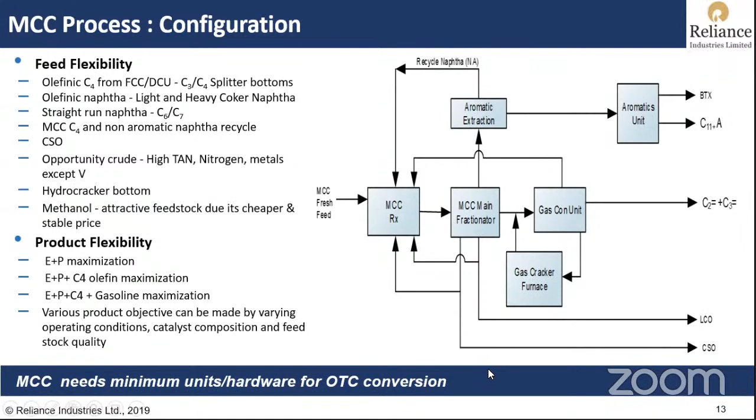One question was for Arvind: in the last 3 years, how many refineries, I mean has Sud-Chemie supplied catalyst to, and where are those places located? Arvind, this is a live streaming question because it's going on YouTube and others, so if you can address it the way you want.

Sure, Dr. Sao, thank you for this question. I understand the question is more generic, if we supplied any indigenously made catalyst to the refineries. The answer is almost every refinery in the country is using one or other type of catalyst, be it for FCC, hydrotreating or hydrogen. I would say almost every refinery in the country has one or other type of catalyst from Sud-Chemie.

Mitra, Fernandez, any other questions there from other platforms for any of the speakers?

Can I ask one question to Dr. Jagdish? Yeah, please. Dr. Jagdish, it was a nice presentation. I have one question: you presented all of these things, and out of them one was DMS, and then you showed that for different applications you get really a 30 cent per barrel benefit, or some energy demand saving around 4 cents per barrel.